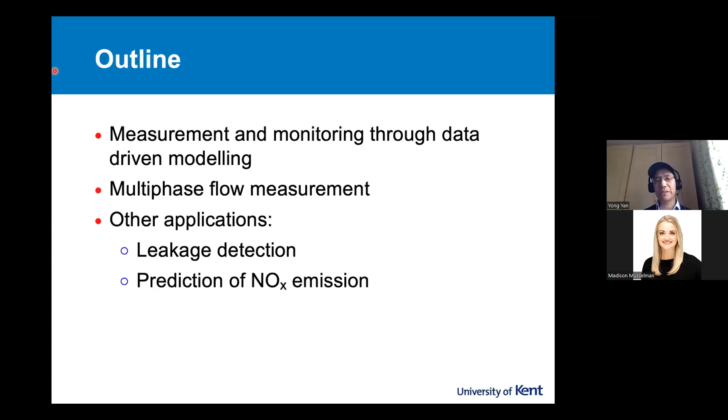Artificial intelligence has impact in many areas of our life or work. In research and development in instrumentation measurement, AI obviously has impact in this area as well. There's a review article published 2 years ago in the IEEE Instrumentation Measurement magazine. I extracted this image, as you can see — they call it applied AI methods, which are used across instrumentation measurement in a diverse range of applications. As you can see, people use different terms, but they mean more or less the same thing: various machine learning, deep learning, or evolutionary computation. There's a lot of terms here, but they're all related one way or another — it's how AI is applied in instrumentation measurement.

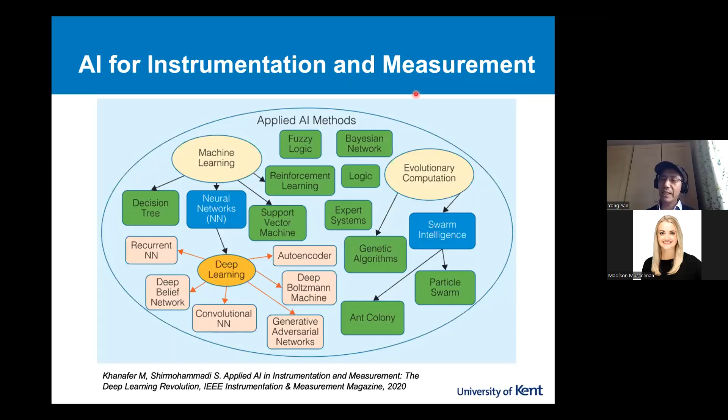So in this topic, I will introduce how AI has affected or helped us to achieve measurement in multi-phase flow metering.

To start with, I'd like to introduce this important area of application. It's called air-oil two-phase flow metering. When we talk about flow, it's normally single phase, but here on this occasion, I'm talking about two-phase. The two-phase here means air and oil. So what is that? What do we talk about here?

You can see the image here — something you may see if you cross the ferry, you will see a so-called bunker barge. In fact, this is an oil tank which supplies fuel for a ferry, like this one on the right. So on the left, the barge is the seller; on the right, the vessel is the buyer of marine fuels. It's oil. The trouble is when you start the so-called filling process — they don't call it filling, they call it bunkering — when you start the process, very often you get air into the system.

So this whole process of bunkering, there are a lot of chances you get air into the oil, but customers are buying oil, not air bubbles. That's how the bunkering process creates a lot of uncertainties in measurement.

If you look at the diagram on the right-hand side, the seller has a flow meter, the buyer also has a flow meter. Each flow meter tells you how much you receive or you sell. In fact, we have two receipts, one from the buyer, one from the seller. The two receipts are never the same, because there's always debate, a dispute.

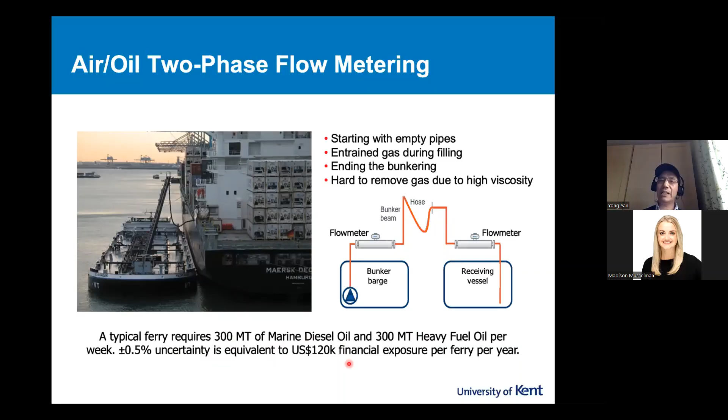There's some high-profile legal cases in the marine industry. I'll give you an example here. For a typical ferry, if we top up 300 metric tons of marine fuel, marine diesel oil, or heavy fuel oil, imagine plus minus 0.5% uncertainty. That is equivalent to roughly 120,000 US dollars financial exposure per ferry per year. A ferry company can have many ferries, so this can equivalent a lot of money per year, which is uncertain. So we need to monitor or measure oil flow rate accurately.

So here's an example to demonstrate what happened during a bunkering process. The whole process is roughly 1.5 hours. The blue line is the flow rate in kilogram per hour. It's steady most of the time, but initially it's uncertain, and during the ending period you can see it go up and down.

The green one is density of oil. It's constant most of the time, but at the beginning and end you can see it's uncertain because air gets into it. The black line indicates air has got into the system. In fact, you got 26.7% duration which has air bubbles getting into the system. So the customers are buying oil, not air.

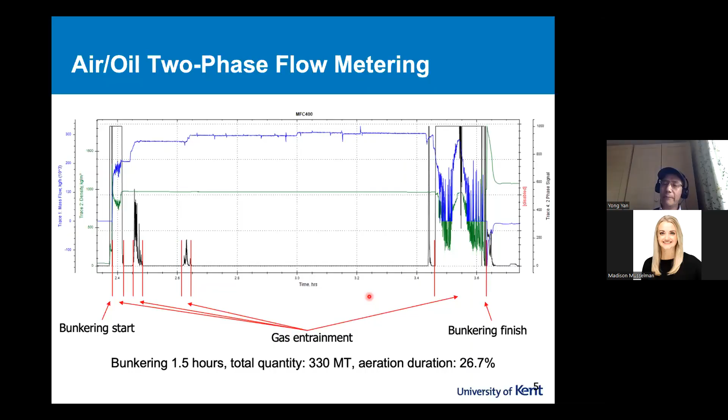So how do we measure oil in mass accurately? It's a challenge. So then we ask, how do you monitor oil accurately in the presence of air bubbles? Ideally, obviously, we want to measure mass flow rate, the total mass. But most proven flow measurement techniques provide volumetric flow rate, not mass.

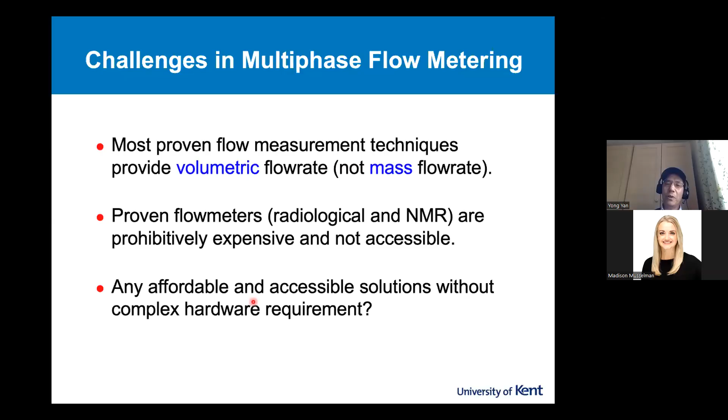There are proven flow meters on the market based on radiological and nuclear magnetic resonance principles. They're very expensive and not accessible, certainly not suitable for wide use across the marine or similar sectors. So here's a question: are there any affordable, accessible solutions? Without complex hardware, it has to be cheap enough so people can afford it. So what's the option here?

We say, let's try data-driven modeling, soft computing, or machine learning, more or less the same thing here. So we did a quick survey in 2018, that's 4 years ago, and did a quick search. There are a lot of research activities going on in the academic community and industrial sectors.

You can see on the left, all sorts of sensors have been used, quite cheap, well established, and you can see the methods used for the data-driven modeling, mostly artificial neural network, SVM, plus some other more complex ones. The target, you can see air, oil, quite common, air, water, and so on, even gas solid. This red box indicates the papers we published. My team has been working on this over the past few years, so we have some experience.

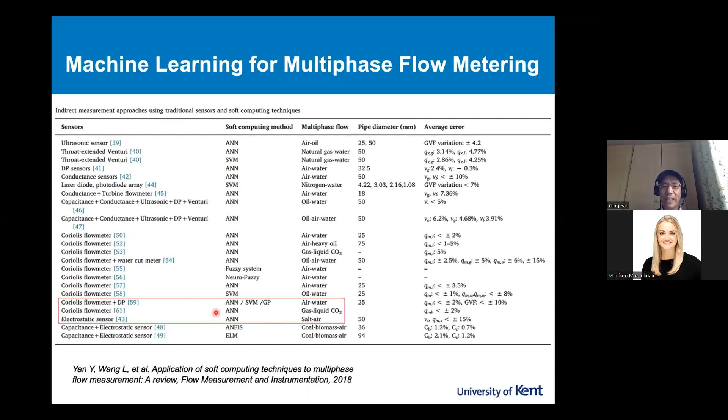So our approach is to use Coriolis flow meters to measure two-phase flow, in other words, oil which has air bubbles. How does it work?

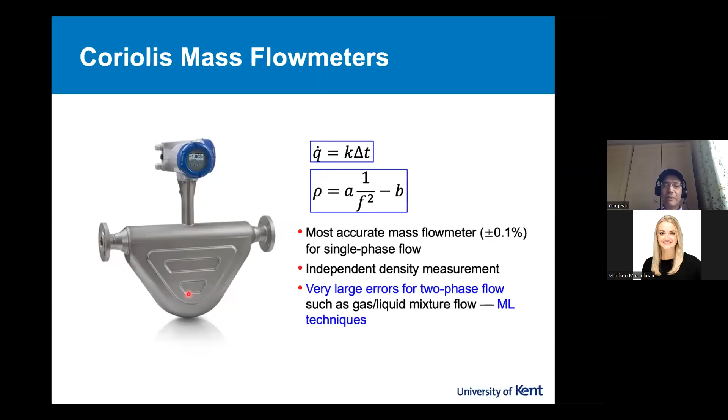Let's try that. If you have any idea about the Coriolis flow meter, it's quite straightforward. The flow comes into the flow tubes, which are vibrating due to the excitation of two metal pieces through control modules. We have upstream and downstream sensors to pick up the signals, the two signals, that's the phase shift, delta T. From that delta T, we can work out mass flow rate, Q dot. Here's mass flow rate, not volumetric flow rate.

In the meantime, we can monitor the oscillation frequency of the tubes. The frequency F can be used to determine the density of the liquid. Now this works very well for single phase flow measurement, I mean single phase oil or just gas, within plus minus 0.1%, or even better. So it's an independent density measurement that's also helpful.

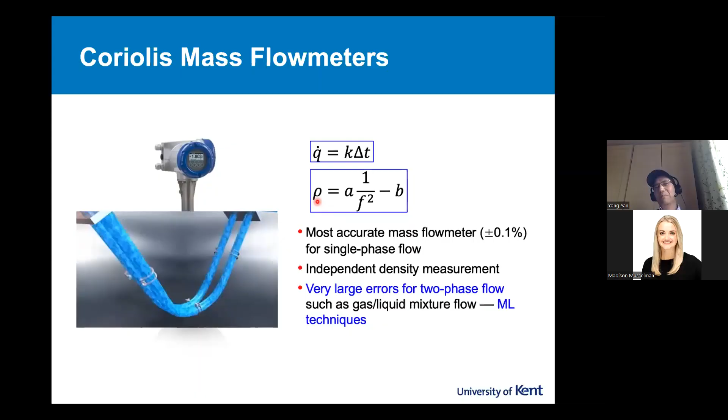The trouble is in real life, in this case, oil has air bubbles. It's air oil two-phase flow, and the errors you get from the meters are very large. You still get the reading of mass flow rate and density, but they're very large errors. The question is, can we somehow minimize errors by applying data-driven modeling techniques without modifying the hardware? Because if you modify the hardware, it costs money, manufacturing implications, and will likely increase maintenance requirements.

So the idea is like this. We still get the so-called apparent mass flow rate and density. We know they are not right, but we have that input anyway. The information is there. We also have temperature, which is embedded in the Coriolis flow meter. We can also include a conventional differential pressure transmitter, which is commonly available and not expensive. That's it - we have data coming into data-driven models.

So it goes through the modeling process. We can predict mass flow rate - hopefully this is the correct one, and fairly accurate, and hence the total mass. In addition to the measurement, we also have flow information such as density, even gas volume fraction - so how much air bubbles in oil, even impurities in the fluid.

The trouble is when a model is built offline, then you use it for online in-situ continuous measurement. So ideally we need to do in-situ training from time to time to enhance the performance of these data-driven models, which were established before we do the installation.

In our case, we are also developing analytical models of gas liquid two-phase flow. This information can be incorporated in the modeling, therefore again to enhance performance of data-driven models. So this is the whole methodology of how we deploy data-driven modeling techniques to achieve gas liquid flow measurement.

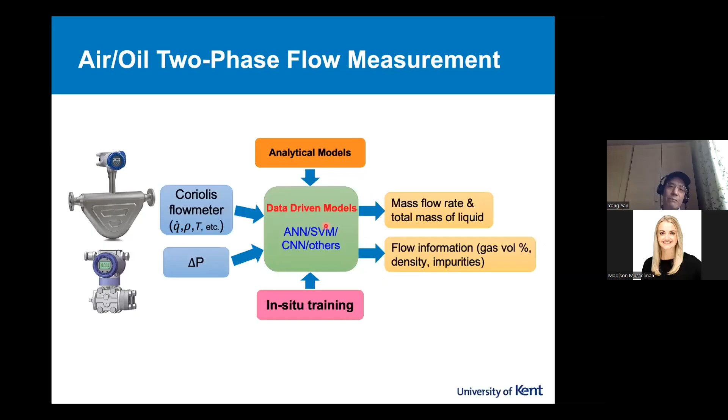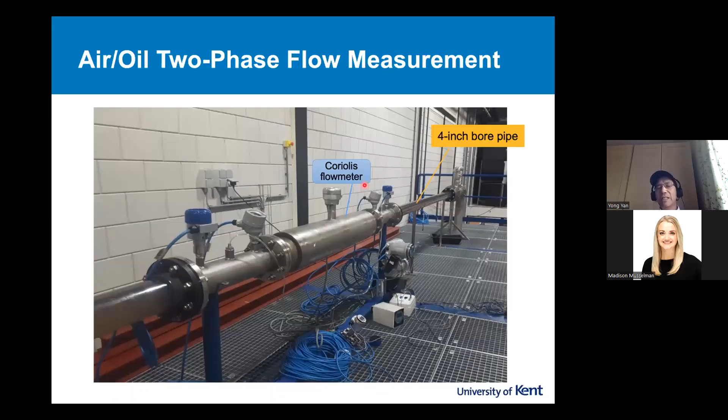Here's an example to show we assess the technology we developed to measure oil flow rate in the presence of air. This is a 4-inch internal pipe. This is a straight tube Coriolis flow meter - some Coriolis flow meters have curved tubes, but this is straight tube. This is against an air oil test. This is a 4-inch pipe, pretty large.

This video shows you what happens if you do have air bubbles in oil. You can see you get a very long and large air bubble, and we have tiny ones. We are not interested in this distribution. We want to measure accurately the mass flow rate of oil. So we have done a lot of work on this.

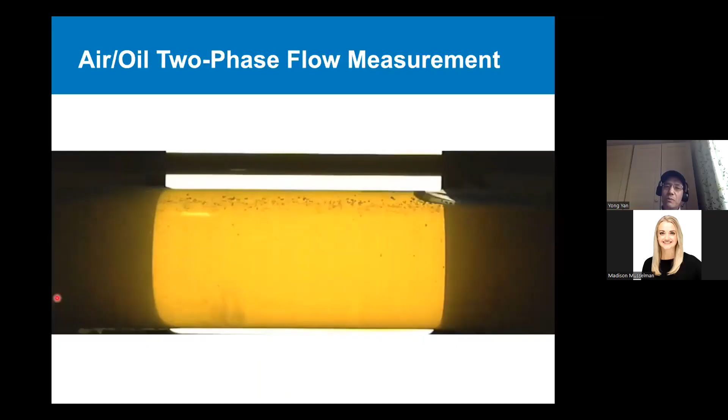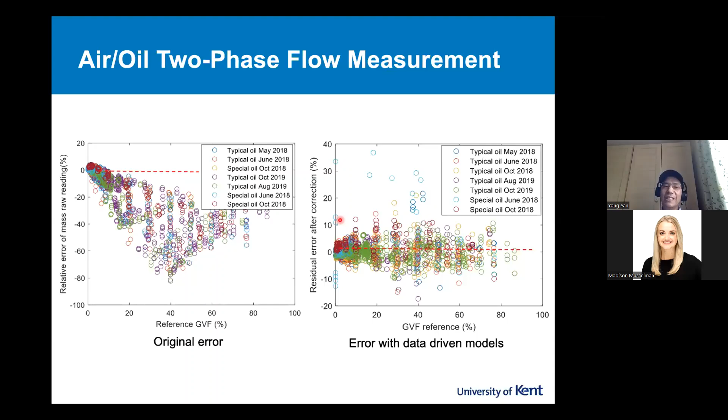We have tested the systems with different oils, typical oils, special oils - that's for commercial reasons, I'm not able to tell you exactly what oil. But the message is there: the data-driven models have helped us improve the accuracies of oil flow measurement in the presence of air.

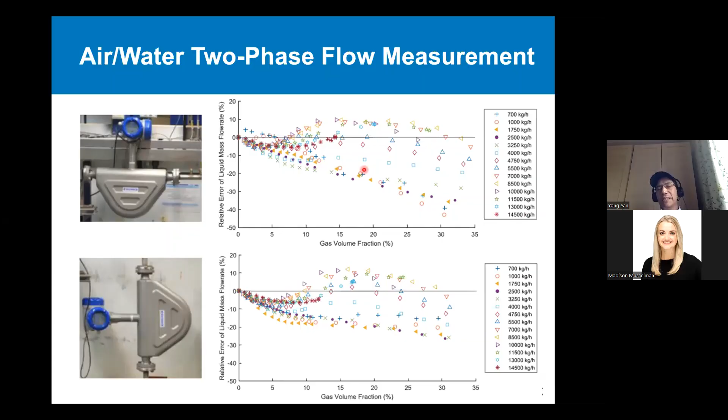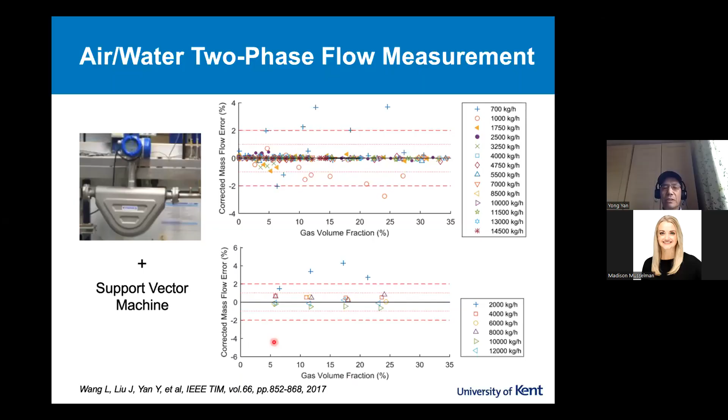So this is the apparent mass flow measurement, which had a lot of errors. Then we can deploy established models to reduce that - this is the traditional Coriolis flow meter plus data-driven models based on support vector machine alone. You can see the error is reduced significantly. In most cases, the relative errors are within plus minus 1%, 1.5%. We published these results in a paper 5 years ago - if you are interested, you can refer to this paper.

Let's move to an entirely different sector - this is like carbon capture and storage, CCS.

The trouble is the CO2 in a transportation pipeline could be in gas form, liquid form, a gas-liquid two-phase mixture, or even supercritical form. The CO2 phase itself depends on the temperature and pressure of the transportation pipeline. For all these reasons, we need to measure the mass flow rate of CO2, not just gas phase.

This matters for trading, accounting, and regulation purposes. Here's an example: imagine a power plant that emits 20 million tons of CO2 per year. A 1% uncertainty can result in 20 million euros of financial exposure. CO2 costs have gone up a lot over the past few years, roughly almost 100 euros per ton as of February this year. This makes CO2 flow metering more worthwhile because of the demand.

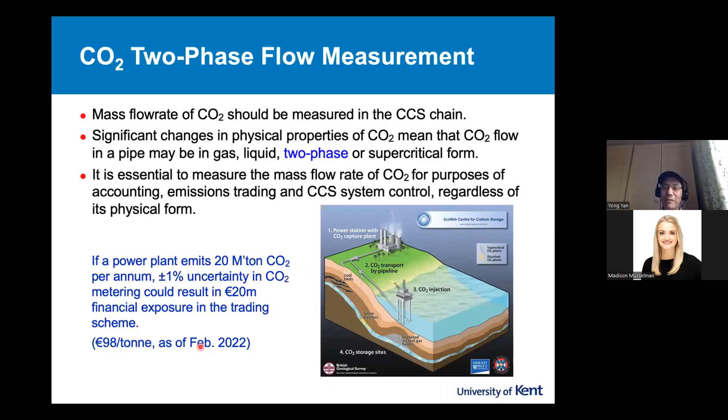The trouble with CO2 flow measurement under CCS conditions is that we need a test platform, and establishing one is not easy. We spent a lot of energy and money to build this — a 1-inch CO2 flow test platform under CCS conditions.

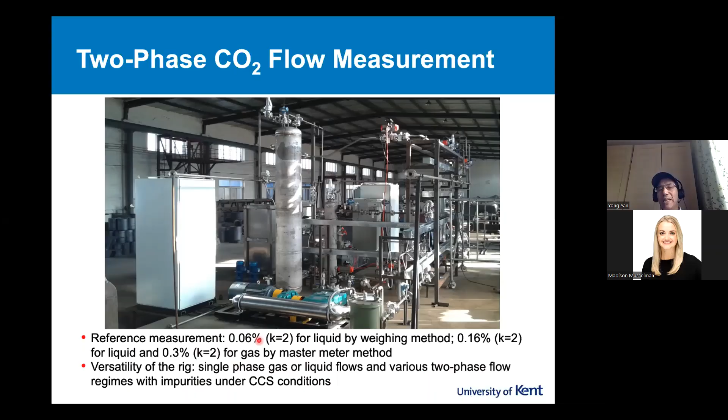On this test rig, you can create gas CO2, liquid CO2, or gas-liquid two-phase CO2. We can also add impurities into the system to test their impact on flow measurement. We have a weighing method to offer a quite accurate reference for flow meters under test, and master meters for evaluation purposes. This should give you some idea.

I have a video clip to show, just a moment. You can see the last one. The idea is very simple.

We fix more or less the gas volume fraction, the same quantity of gas CO2, then change the flow rate. It's two-phase — you can see the bubbles on top at low flow rate, then it's partially stratified, then fully turbulent flow. This shows what happens in CO2 flow pipelines, with this flow regime in a horizontal pipe. Again, we want to measure mass flow rate without actually quantifying the exact flow patterns.

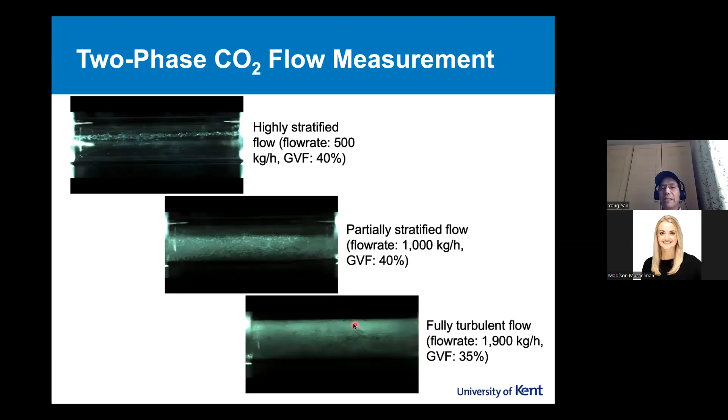Here's a setup. This is the Coriolis flow meter under test, and this is the weighing column which offers our reference.

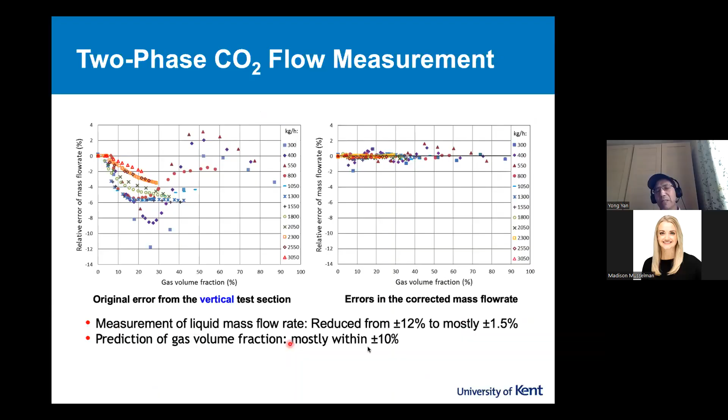This is the test we conducted on a vertical test section. On the left are the errors of mass flow rate from the Coriolis flow meter without the data-driven models. On the right, after applying the models, the errors are reduced much smaller, mostly plus or minus 1.5%, which is quite acceptable to the CCS industry. We can also measure gas volume fraction within plus or minus 10%.

This was the vertical test section; for the horizontal one, it's similar. You can see originally the errors go all over the place, but after data-driven modeling we improved quite a lot, again mostly plus or minus 1.5%. We published these results in the International Journal of Greenhouse Gas Control, about three or four years ago.

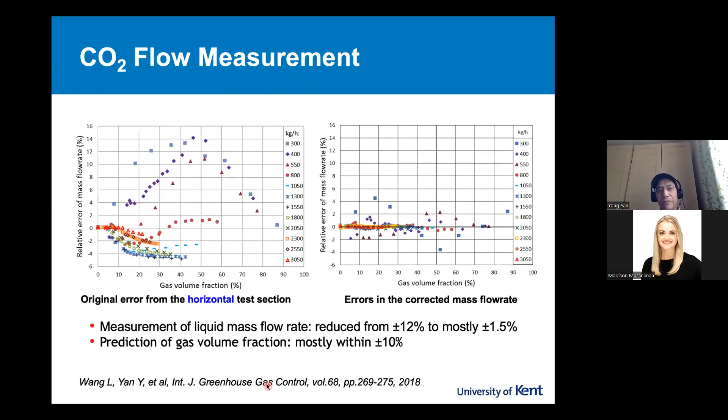I'm trying to show this video here. You can see it. Apologies, I'm not able to click the video clip here.

This shows a transient process during startup, like a CCS process. Initially it's gas phase CO2, then liquid CO2 comes from left to right. In the power industry, the CCS process is quite dynamic — the CO2 flow starts as gas, then liquid, so you get a lot of transient processes. How do we monitor this? It's not easy. That's the whole idea.

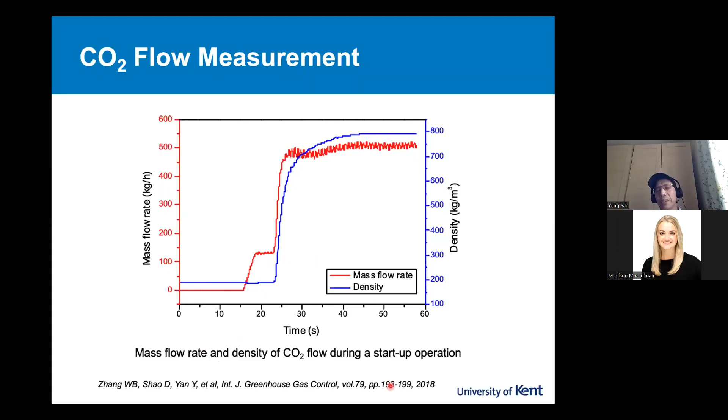I have that video clip, unfortunately can't see it — but you can see the mass flow rate step increase at stage 1, step increase at stage 2, and the density change as well. This is a transient process, and we want to monitor the flow rate of CO2 under such dynamic conditions. We've done a lot of tests and the results are quite encouraging. This is published work — if you're interested, you can refer to these publications.

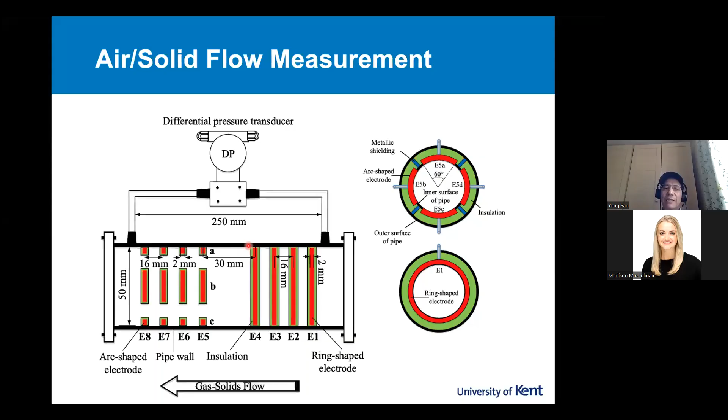The sensing unit is very different from other multiphase flows. You can see we have a circular-shaped electrode, arc-shaped electrode, and the differential pressure. Then we go through a signal processing stage and deploy a neural network, support vector machine, and convolution neural network. The idea is to get the mass flow rate of solids.

We have been doing this research for some years, all conventional, but we have attempted to use data-driven models to do the same thing to see if it's better.

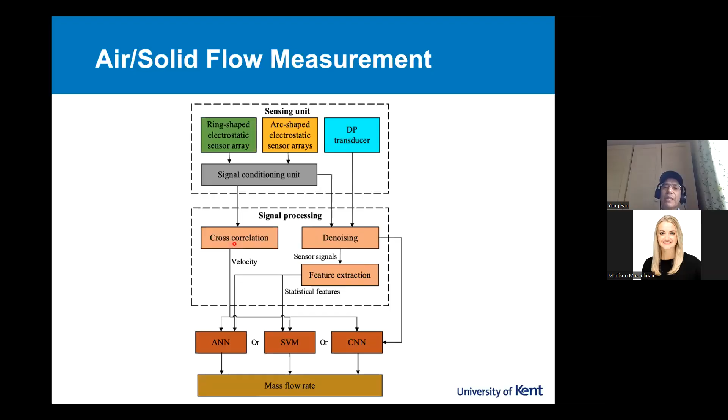This is a test rig in our lab. You can see that particles come in from the right-hand side, go through the test section, eventually going to a suction pump. You can see the flow meter here is a 2-inch pipe, and on the electronics computer, you can see on the left-hand side.

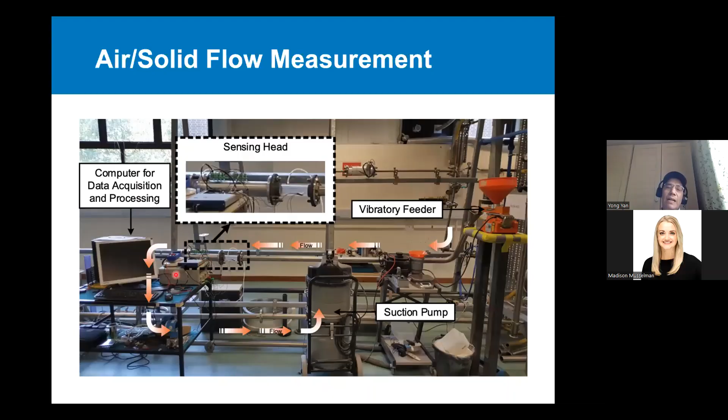We feel quite encouraged actually by the method. Again, the hardware is already there—we've done a lot of traditional conventional research, but now we just add models, and the performance is indeed improved, to some extent.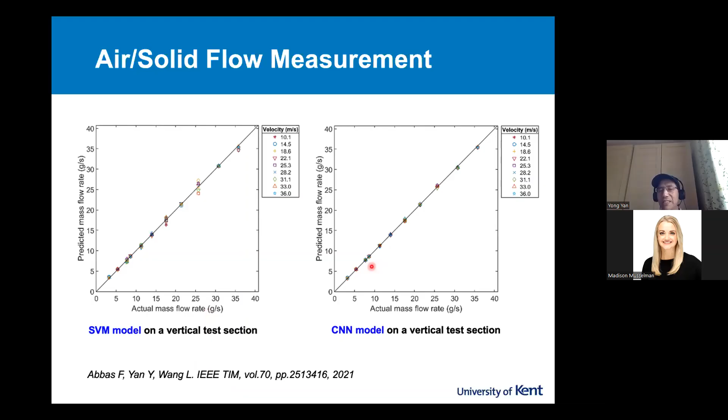Last bit about leakage: from a process it's difficult to capture CO2, then you go through some 100-kilometer transportation, and that CO2 could leak. So there's a demand—how do we detect any leakage? And they want to also know what's the leakage rate. Sometimes the CO2 pipeline also has impurities, such as nitrogen. Do we know how much impurity is in that?

So again, we use the test rig presented earlier. We have this storage column, and we can weigh the mass, so we have a reference—how much mass loss per unit of time. So we have reference leakage rate. Now we have used acoustic emission sensors plus a thermometer, and we can monitor the leak rate.

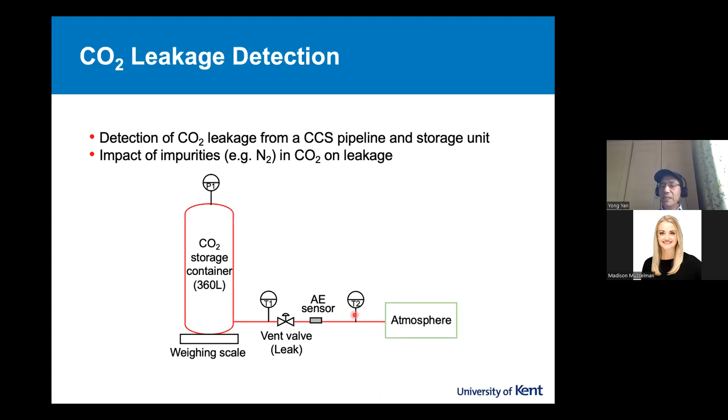Here's the setup as the reference column, and here's the actual setup. You can see the acoustic emission sensor, low cost, and we have a temperature sensor. And we can create different leak conditions.

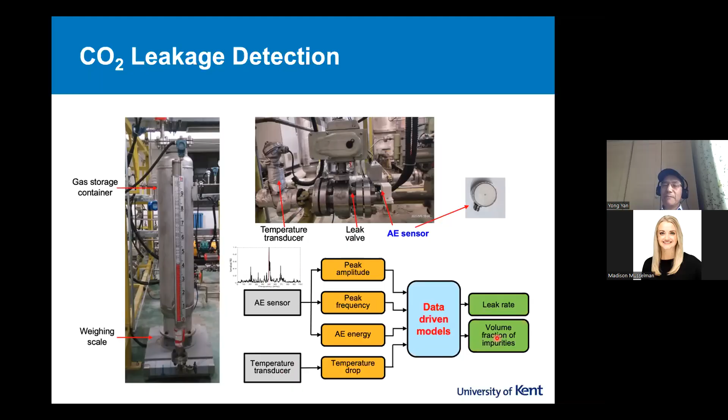We tested the methodology again, just like flow measurement. We deploy data-driven models and extract features from acoustic emission signals in the time domain and frequency domain. We also incorporate the temperature output, and all this information is combined and input to the data-driven models, so we can predict leak rate and even volume fraction of impurities, if any.

Here's a typical result—you can see the measured leak rate and the relative errors here. It's quite good, plus or minus 3% in most cases. We even achieved quite accurate prediction of nitrogen impurity volume—surprisingly good. We are still working in this area, so more results will be reported in future. We feel the potential is there.

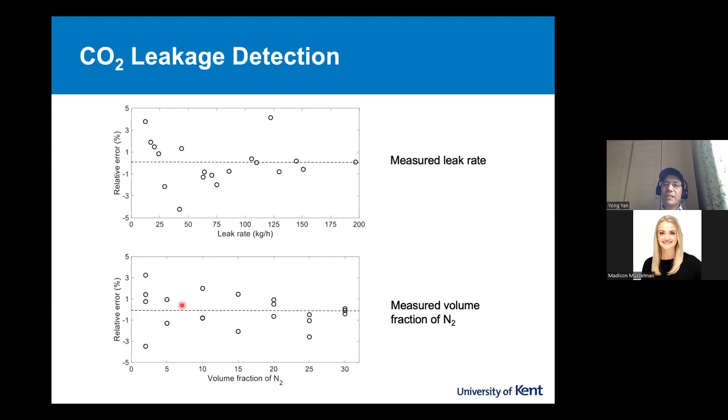Last bit is about how do we use data-driven models to achieve combustion process monitoring. About 10 years ago, we started to try this approach. We have this EMCCD camera, you can see on the left, plus a spectrometer—again, small, miniature, and quite low cost.

So we have this radicals image from a combustion burner flame, and we have flame temperature information from the spectrometer. Again, we extract all the features, then fit such features into data-driven models, so we are able to predict a so-called equivalence ratio. This is an important indicator of the combustion quality, and you can see it's quite good prediction here.

In the meantime, we can even predict NOx, how much NOx is emitted from the combustion process. Again, this is surprisingly good for very basic data-driven models. So that's from 10 years ago, and since then we've continued working on this.

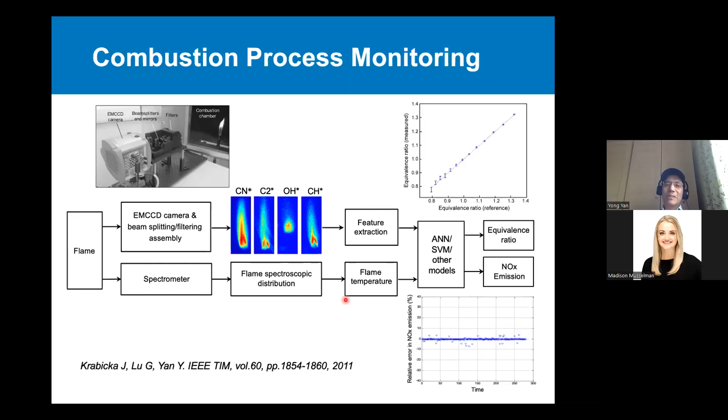We're trying to improve the sensors and improve the data-driven models. In the past 2 or 3 years, we did a lot of tests on an industrial scale combustion test plant. It's quite large in scale, very difficult to do, and it costs a lot to run such tests. This is a downwards burner, where the flame faces downwards.

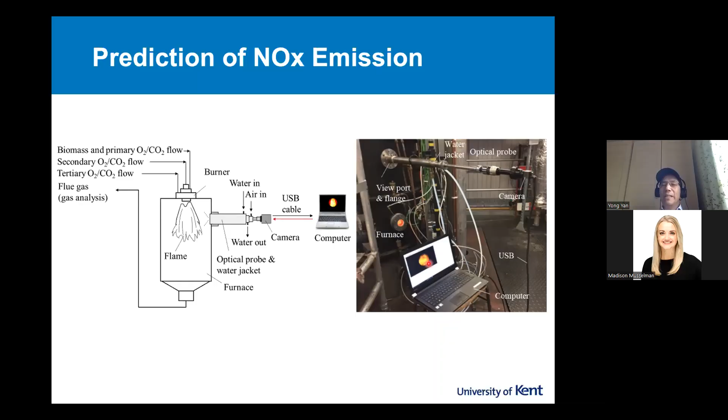On this occasion, we have biomass fuel, and we've tried different fuels here. So we have an imaging system that gives us imaging here. This imaging can be used to derive a lot of information for measurement purposes. For example, from the images on top, we can measure temperature profiles, and the temperature profiles have a close correlation with NOx emissions.

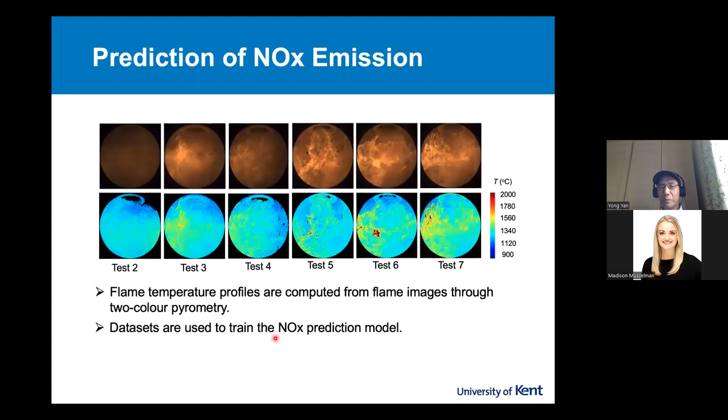Once we have a temperature distribution, we fit that information into data-driven models. We use the dataset we collected to train the model so we can predict NOx. Then most recently, we've made more progress applying so-called CNN models to achieve online deep learning performance.

In other words, you don't just develop an offline model, you test it under online conditions. Our idea is to develop a model and also retrain it by incorporating new data coming in - kind of like in-situ training, for constant improvement of the models we established earlier. This is important to maintain the performance of previously trained models under real combustion conditions.

The data we obtained is very encouraging. The details are published in the TIM journal. My time is limited here, so if you're interested, do study this - it gives you some idea how we achieve so-called online deep learning by incorporating new data.

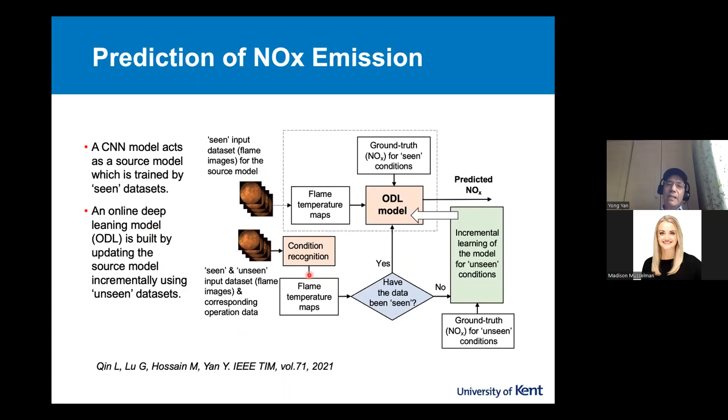Finally, we are working in the same area here, trying to deploy data-driven models across the whole combustion plant. Now, a conventional combustion plant produces electric power 24/7, non-stop. But in the modern power industry, they have a very complex power grid with a lot of energy sources - conventional, renewables - requiring constant optimization. So the power plant has to be operated in a flexible way. You can expect frequent start-stop of a 600 megawatt power plant, or constant load changes - 300 megawatt, maybe 400 megawatt, then back again.

And the fuel isn't just one fixed biomass - it could be different biomass, could be coal, could be oil. In other words, the fuel diet is constantly changing. All this creates so-called flexible operation conditions - they call it a smart power plant.

All these variations create demand for modern measurement systems. How do we make sure the combustion process is optimized constantly, regardless of changes in load, fuel diet, or restarting after a short period of time? This is quite a challenge for people like us, like my team. How do we help the power industries achieve constant optimization? We are still working on that.

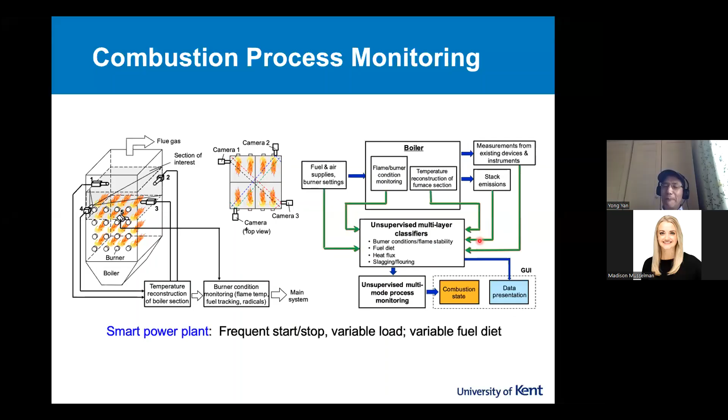You can see we've deployed imaging systems across the whole boiler, and we get a lot of data. The imaging system gives us a lot of data, plus traditional data such as temperature, pressure, what kind of fuel, and emission data. The idea is to try to achieve constant optimization despite changing conditions. That's our idea - results to be reported in future.

There are some very important questions when we talk about how we deploy data-driven models in the field of instrumentation measurement. Is the data modeling approach really necessary? Do we have to use it? This question comes up every time I give a lecture like this. Sometimes if the measurement problem is quite straightforward, conventional methods are good enough - you don't need to use a data-driven model. It's overkill, in my opinion.

But for the examples I've presented, there are no easy solutions. Data-driven modeling has helped us achieve things we couldn't do in the past, without too much increase in cost. In my opinion, this approach is very good for resolving challenging, difficult measurement problems. If something is easily done through conventional methods such as cross correlation, image correlation, or other methods, you don't need to do data modeling.

Another question: are the models we established under lab conditions transportable from a test rig to a plant? Yes, valid question, I think it depends. If the test rig is able to recreate all the conditions we're going to test in a real plant, that's okay. If not, then that's a different case.

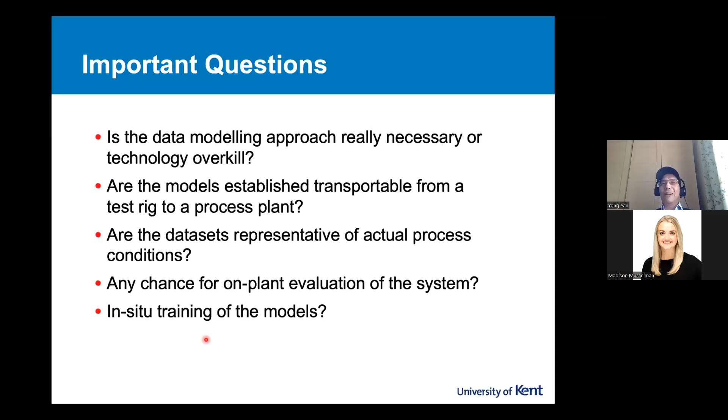Then you say, how do you do in situ training? Where do you get reference data from? It depends on the process. Sometimes you're able to obtain reliable references, such as from calculations, or from another master meter which you borrowed or hired, or you somehow get the data. If you trust this data, it can feed into your model, so you could do in situ training. It's possible. This kind of routine is recommended—it's also a limitation of the data-driven modeling approach.

So here's my concluding remarks. I'd like to summarize by saying that data-driven models have been deployed successfully in some cases. As I've presented, the models we developed—mostly artificial neural networks, support vector machines, and their variants, with various combinations—give really good performance.

Our tests so far are mostly under lab conditions and industrial scale large facilities. We are still working so they can be evaluated on real plant conditions—that's why further work is required. We can see the potential, but we need to do more work. I'm familiar with multiphase flow, combustion process monitoring, and leakage detection, but the potential is that if you can deploy the same approach in other industrial sectors, why not? Some are being researched, but some are still premature—further work is needed to explore how good this data-driven model approach is for other applications.